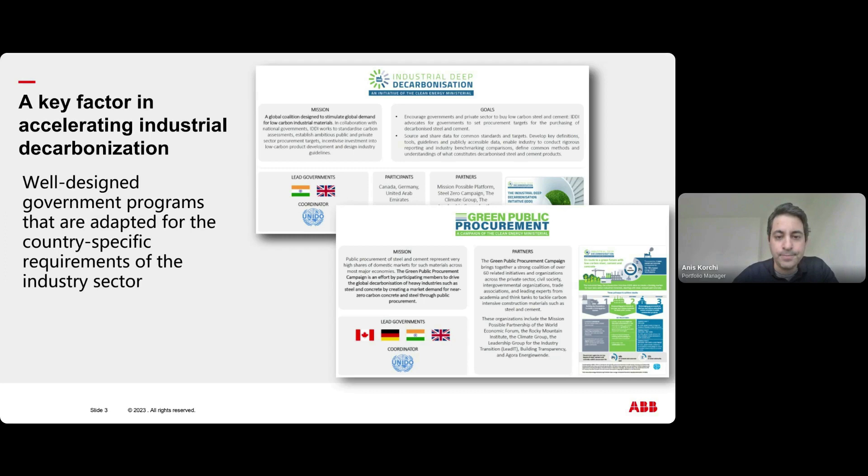There are several standards out there, but one which is widely followed in our industry is the ISO 50001 certification. We see it growing in number across the globe and across our verticals, and more organizations are implementing it in order to benefit from the beneficial cycle we explained in the previous webinar: monitoring our energy, doing some forecasting, and then stepping up with optimization exercises. Those organizations are also following this certification to show their engagement towards decarbonization, to their supply chain partners and also to the local authorities.

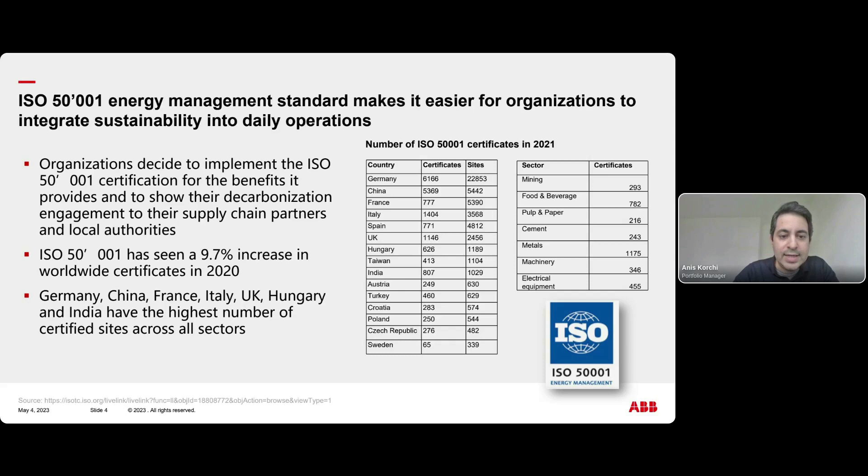We would like to illustrate this with a case study from one of our clients in China. This client was recognized by the international organization Clean Energy Ministerial. The case study here is a cement plant in China which has followed the certification of energy management, and they have also well documented the progress over a 5-year period.

The leadership of this company pushed hard, positively, for their team to set what we call science-based targets. They also pushed to have a continuous evaluation process and to introduce all of that into their daily processes in order to have the right accountabilities and responsibilities within their company.

Several initiatives were run to lower their coal consumption. Examples are using alternative fuels, and other examples are related to introducing energy-efficient equipment. Doing so, they were able to reduce their energy consumption by almost 8%. And of course, there are several factors that can explain that.

Software, yes, it's one of them, but it is not the main parameter there. But we still need to explain that without a proper energy management software, a well-structured analysis of their energy consumption, a data-driven program also would not have been possible. By going with that approach, this client was evaluated by an external auditor as an enterprise which is outperforming its peers, not only in China, but also abroad.

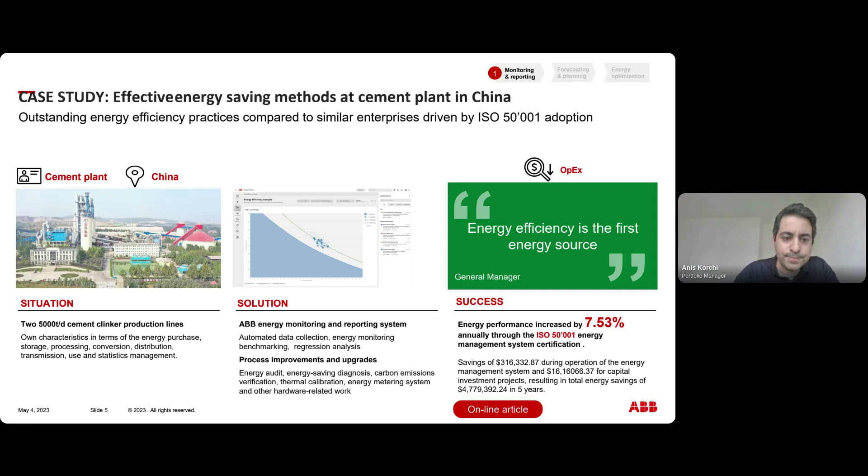Here you have another example in the mining industry where embedding sustainability into the daily operation was done successfully. Within their centralized control system, this client has run an energy management software along with other technologies like substation automation, power control, advanced process control, and also extensive predictive maintenance.

All of those building blocks, or digital Legos, enabled the client to install new processes to reduce their water usage by almost 90%. They also reduced their fuel consumption by around 70 to 80%, and they divided their greenhouse gases by two. So it's quite an achievement, but this achievement can be pushed much further by introducing solutions to do energy forecasting and optimization. This is what we will try to demonstrate in the coming slides.

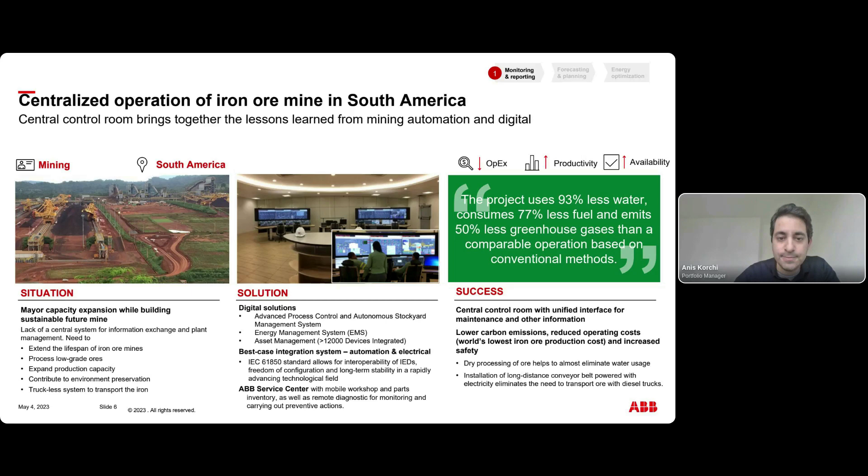Here, I would like to explain that energy optimization can be done in different ways, and one of the options is to do load management. It is about using an asset when demand is small.

To better explain this concept, I will use a simple case from our everyday life, which is commuting to work. Let's imagine this is me commuting to work using an asset which we call the road, the national road. Living downtown means driving to work against the traffic flow and avoiding most of the traffic jams. This means I'm using that asset, the road, when its utilization rate is low.

The same thing happens in the evening driving back home. So the conclusion here is that my load balancing for the asset, which is the road, is fairly good, but there is still room to improve this.

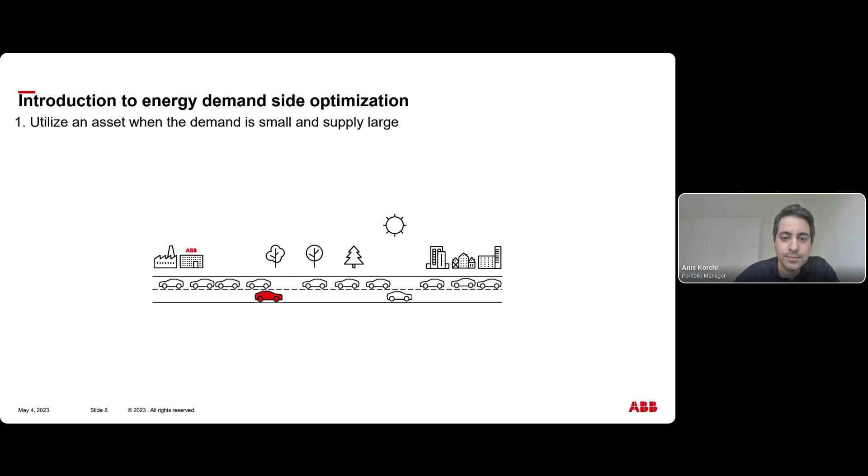In fact, I will find the total optimum by shifting my demand pattern even further into the night when there is even less traffic and close to unlimited supply of this asset, which is the road capacity. Some of the traffic lights are blinking during the night, so it makes my commuting quite smooth.

I don't need to accelerate, stop, and start again my vehicle, so it's more efficient in terms of energy consumption. Now by doing that, I have an optimized solution against one asset - that's the road. My travel time is at the minimum and cannot be improved further. If there would be a road market, the price for that asset would be optimal at those times.

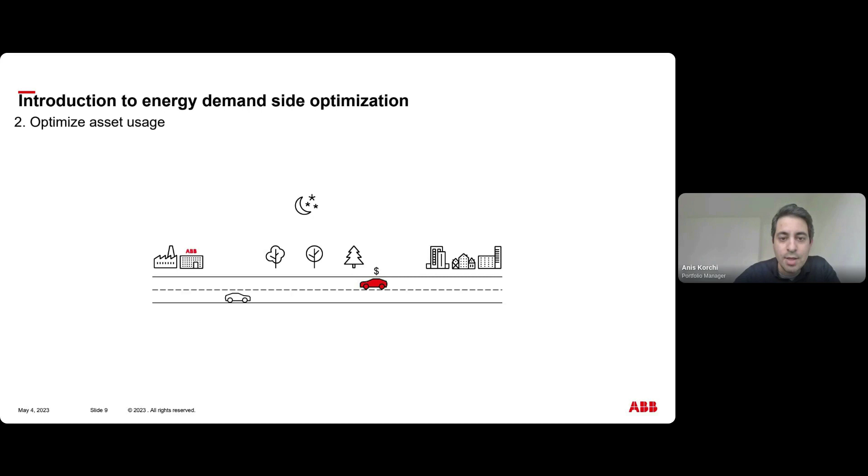But reality is a bit more complex because we cannot just drive in by night. We have other commitments. We need to spend time with the family. We need to sleep to be productive during the daytime. So here we need to rethink this optimization a bit and adapt it to those daily constraints that we have.

Taking into account those constraints, we can then build a cost function leading to the optimal schedule of my commuting. In practice, and also intuitively, it will mean that we will leave home a bit earlier at dawn and drive back home before the rush hour.

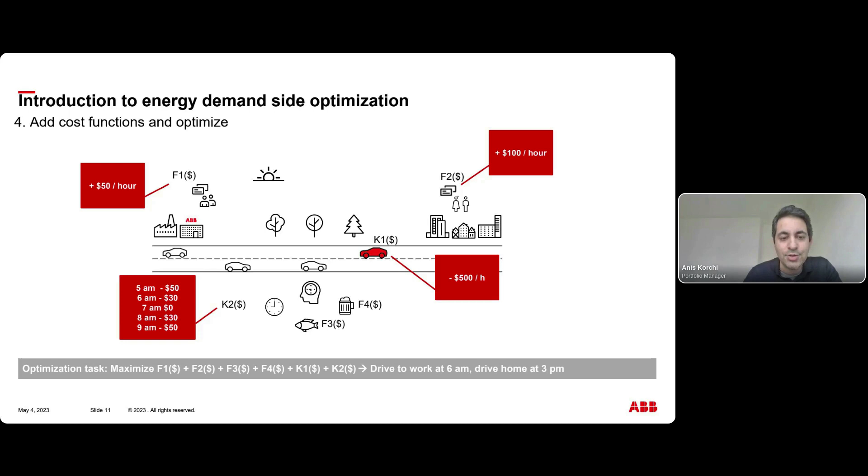So quite intuitive - we don't need complex formulas to get to that conclusion, and we don't need a complex spreadsheet to do that either. But if we go back to the industrial setup, I would have hundreds of those constraints, if not thousands. The situation would also change constantly every 15 minutes, depending on the energy market. And we may also have several assets to optimize in parallel.

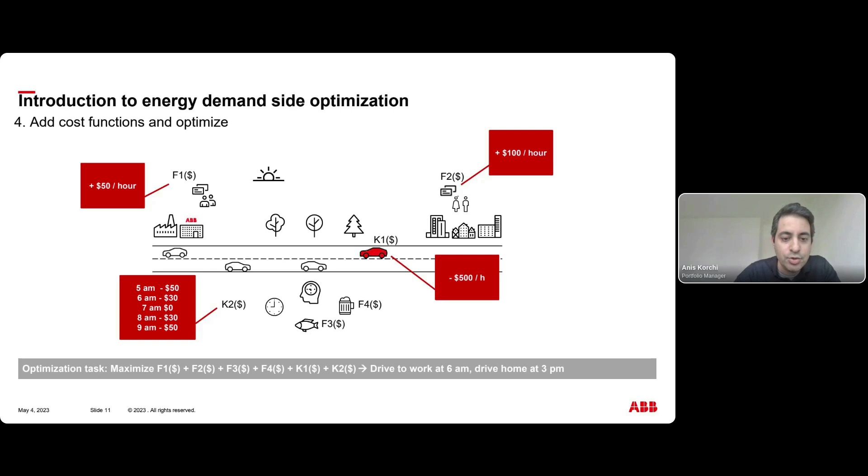So this intuitive analysis, and also a simple spreadsheet with a few linear equations, will quickly fall short when trying to optimize the situation. This is why we would like to introduce you to a different way of doing it - a bit more sophisticated, using a digital solution.

To illustrate that, this is a client we have in the metal industry. This client has a complex melt shop that includes several constraints related to the melting configurations, but also different constraints related to the processing, transportation, setup, and cleanup activities.

The customer's objective here was to reduce its energy cost and be able to run various simulations and what-if analysis. One of the key assets they wanted to optimize was the electric arc furnace, which is a high consumer.

We have thus enabled a digital energy optimization system that automatically generates an optimal production schedule for the next 7 days. It takes into account the energy prices in the volatile electricity market, but it also takes into account maintenance plans, the current status of the melt shop, the availability of different equipment, but also penalties and violations of hold-up times between stages of the process.

Overall, we were able to provide 2 to 5% energy cost reductions, which is quite sizable when you look at the absolute energy consumption of this client.

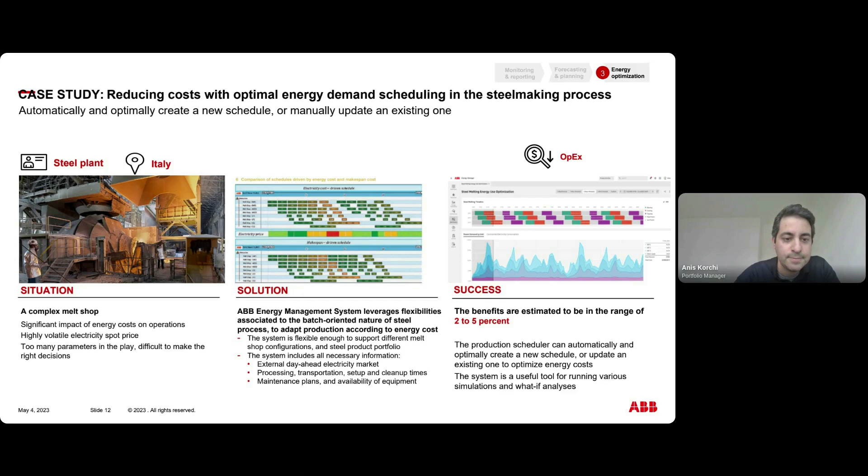I will use this slide just to summarize the fact that there are several ways to do energy optimization. The one that we have discussed in the previous slides is what we call more focused on the demand side. So we are scheduling our assets, taking into account production flexibilities and the production buffers.

There is another way to optimize. It is about looking at the energy supply, especially when our sites have access to electricity from the grid, but also you may have your own powerhouse, maybe some additional renewable energies, and also some energy storage facilities directly on your site. The key question is, how do you balance all of that in order to reduce your overall energy costs?

So I will give now the lead to Nazanin, my colleague, to take you through a few examples that will explain that. Thank you all. Thank you, Anis.

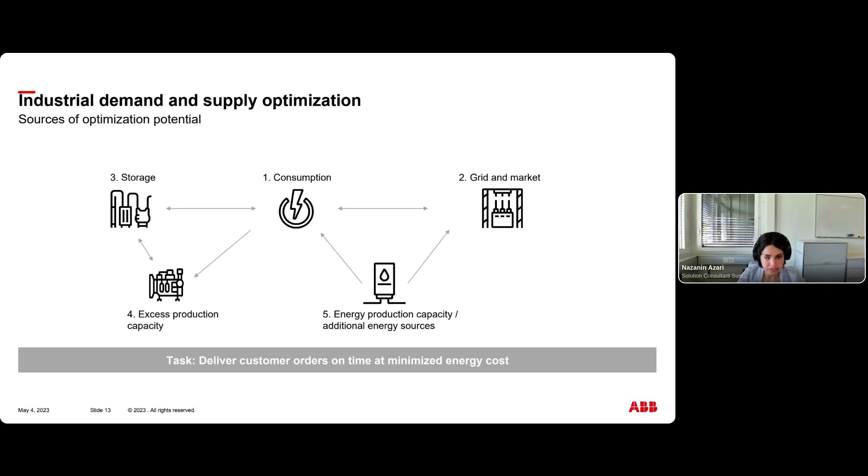Handling the supply side of the energy is also an interesting topic. Let me give you an example from a pulp and paper customer with 14 mills across Europe. The company has its own generation and shares in various power plants, and faces complexity arising from variable, but also potential, more affordable electricity prices on an hourly basis in a day-ahead market, and is also planning to switch to 15-minute time steps.

The optimization in this case is around energy source balancing and energy trading opportunities. Energy cost optimization takes into account all available resources, their prices, and the operational constraints they have. Additional profits were realized from effective use of energy reserves and hydropower here. This customer reported that the initial system payback was only a few months.

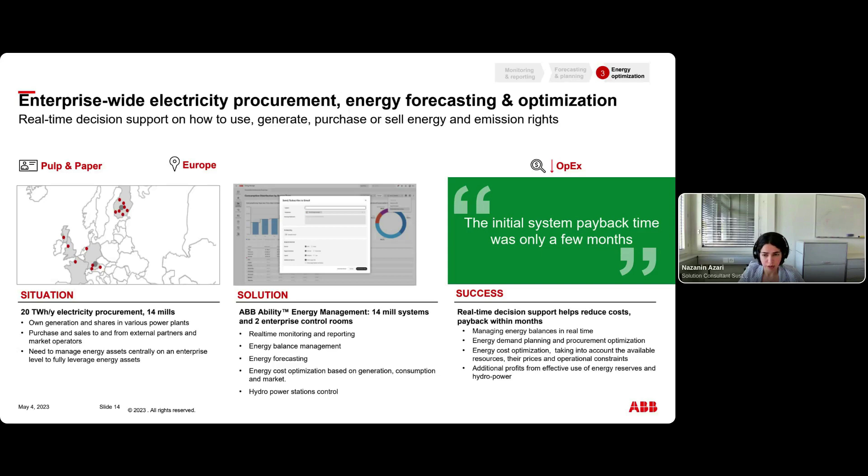What else could be optimized? Let's go to another case study from pulp and paper. Pulp and paper mills have boilers, which represent another complex optimization problem. Not only is steam needed at different but very specific pressures and temperatures, but the consumption rate is highly variable due to variability of process conditions, trips or starts of steam consumers, and so on. Steam network stability and reliable power output are difficult to attain.

On top of this, further constraints are added by variable prices and local rules for the energy market. This is a perfect case for an advanced process control solution, which was successfully implemented in digester, bleach, and pulverized fuel boiler plants. It brought 3 to 5% savings in steam cost and pays for itself in less than a year. This South African mill ensures a much more stable and reliable energy supply thanks to digitalization.

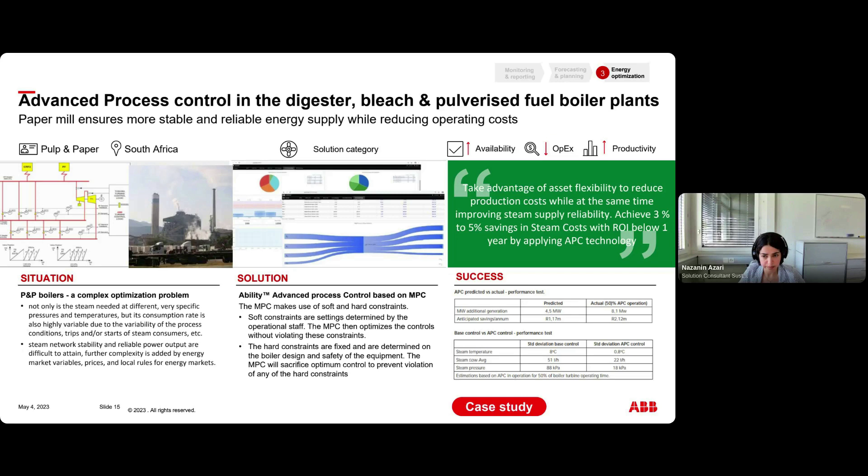One more digital champion I would like to talk about today is an integrated steel mill. Energy represents about 20% of their production costs, and therefore energy efficiency is crucial for both profitability and their environmental policy. An integrated steel mill generates higher calorific value byproduct gases at varying rates.

The differences between gas generation and consumption rates are compensated with gas holders. However, under certain circumstances, the imbalances can lead to the flaring of excessive gas or require the purchase of supplementary fuel.

ABB's energy management system has sophisticated monitoring, planning, and optimization tools to model complex energy interconnections between various processes of the mill. It determines the optimal trade-off between gas holder level control, flare minimization, and optimization of electricity purchase versus internal power generation. The system not only reduces cost and improves energy efficiency, but also manages carbon footprint and provides environmental reporting features.

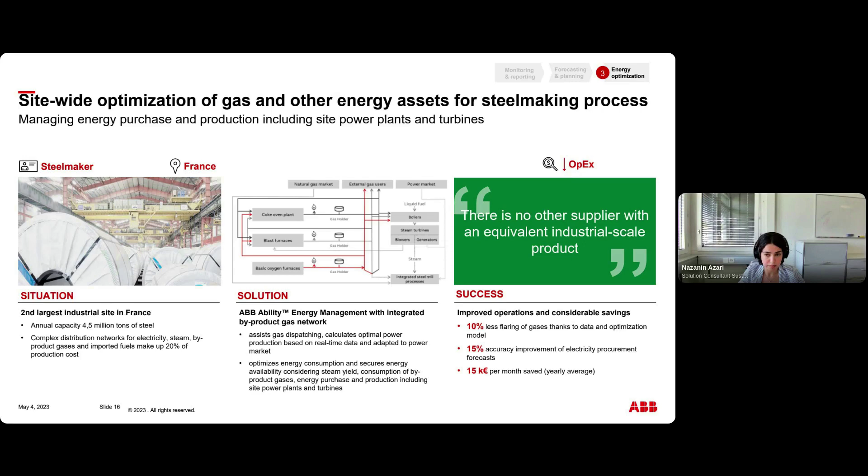To summarize today's session: the typical steps and modular approach for deploying digital solutions for industrial energy management start with monitoring energy usage at plant and process level with real-time visualization and data display. With that, you can identify best performance of process areas and opportunities for improvement, and get reports on energy consumption patterns of process areas and production lines, which helps analyze inefficiencies in the plant and process areas.

By setting up alarms and notifications, corrective measures can be taken immediately. Forecasting energy consumption schedules for process areas based on production plans and measured consumption, as well as solving real-time economic optimization problems covering your own generation, trading, and use across industrial plants and power plants, helps you save costs.

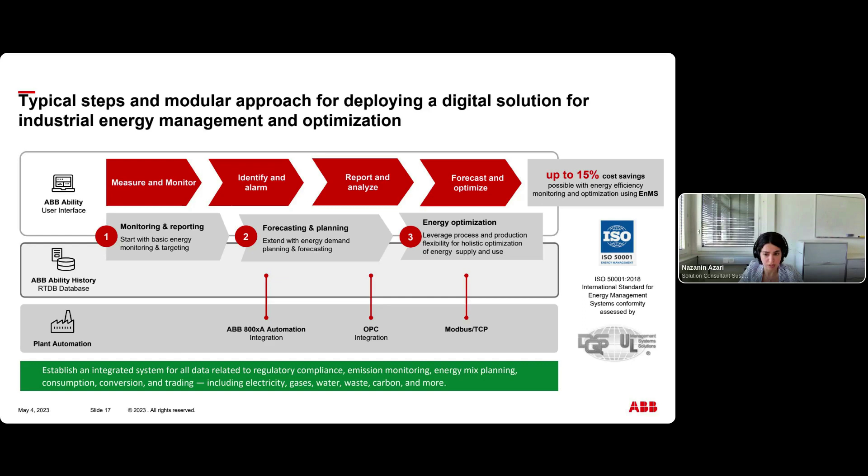As you could see today during the case studies, there are no two plants that use energy in the same way. Energy price fluctuations, time-varying transfer, conversion, and use of utilities, as well as renewables, may disturb highly sensitive continuous processes. This may increase energy cost and have a negative impact on product quality or even result in downtime. That's why industrial plants need a purpose-built energy management system that adapts to their specific processes, energy mix, and local market and regulation.

Let's quickly show you how it works. In my demo, we have specific demos for mining and for metals, as well as for pulp and paper. Based on today's attendee statistics, I would like to show you the pulp and paper demo.

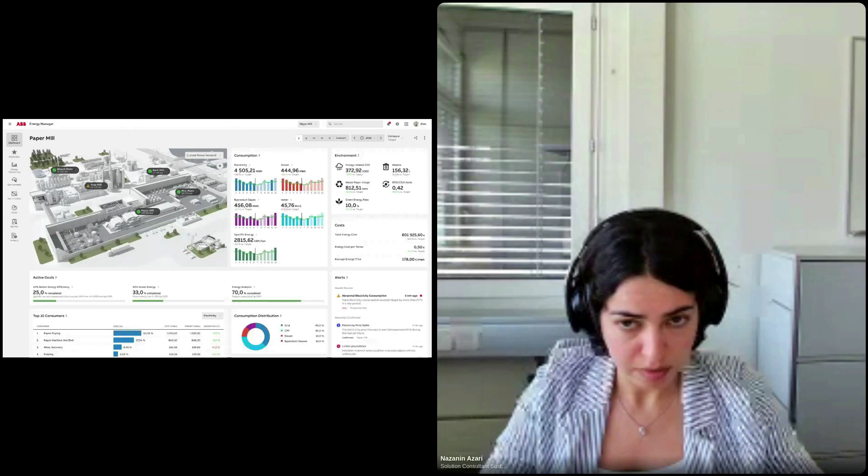Keep in mind that this demo consists of dummy data and simulations, so that's one thing to mention.

Most mills have ambitious sustainability targets, and they may still use Excel to aggregate data and total energy consumption and cost. There are also some calculations and data tracking being done in a semi-manual way. To generate an ESG report is time consuming, sometimes taking up to 5 days to consolidate that data. But having a modern digital platform for energy and sustainability on an enterprise or plant level can automate this kind of report generation.

By having the dashboard view, you can have an overview of your whole system and plant in one glance. It visualizes the trends for energy consumption, and we're not just talking about electricity, we're talking about steam, gases, water, and specific energy. We also mention environmental KPIs like wastewater and CO2 or green energy rates.

Having those, and being able to adapt that to the roles that you need on the site, which need to track these values and also track them at different resolutions, would help you be more efficient in this area and be able to reduce at least 40% of the time required for reporting and analytics. This also helps you maintain and obtain the ISO 50001 certification.

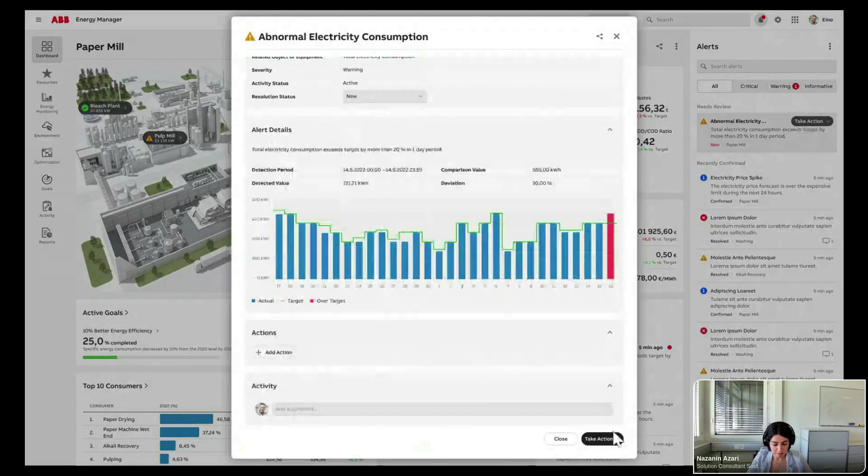Since you have this platform, it's also easy for you as you introduce renewables to your plant or new processes in your system, as well as if you're starting to participate in the energy market. By having automatic notification, you can also see abnormalities and uncommon patterns in your system, be able to investigate, and be able to track and take actions.

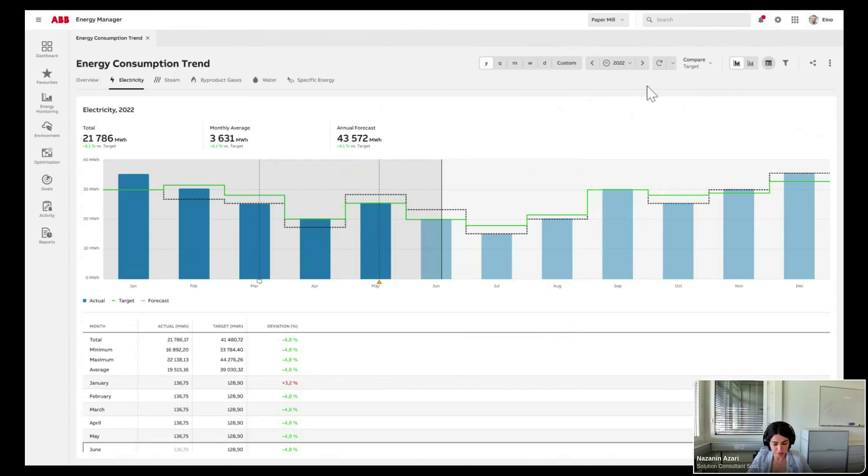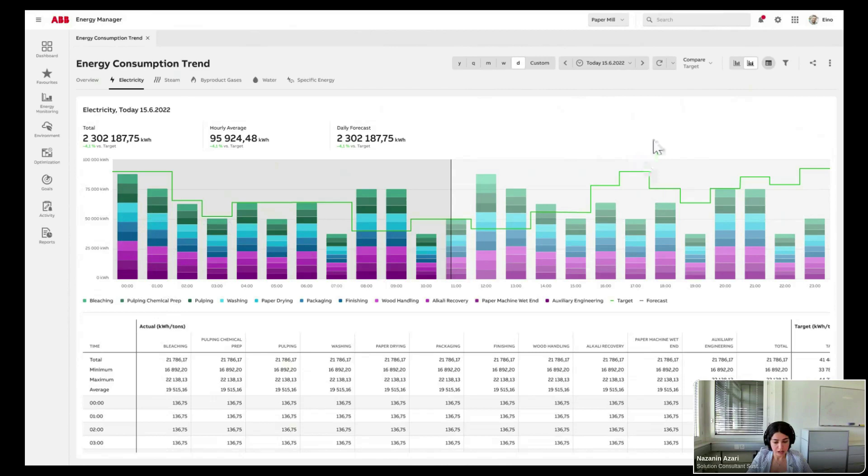Let's go to our consumption. Here you have the real-time online tool, and you don't need to wait for a report from each department. You can also see the comments as well as disturbances happening on the site to basically define the deviations happening and why you're far from your target or forecast. By having granularity of data coming from each part of your plant, and also what you're getting from each department, you can track and make better analytics and decision making on your site.

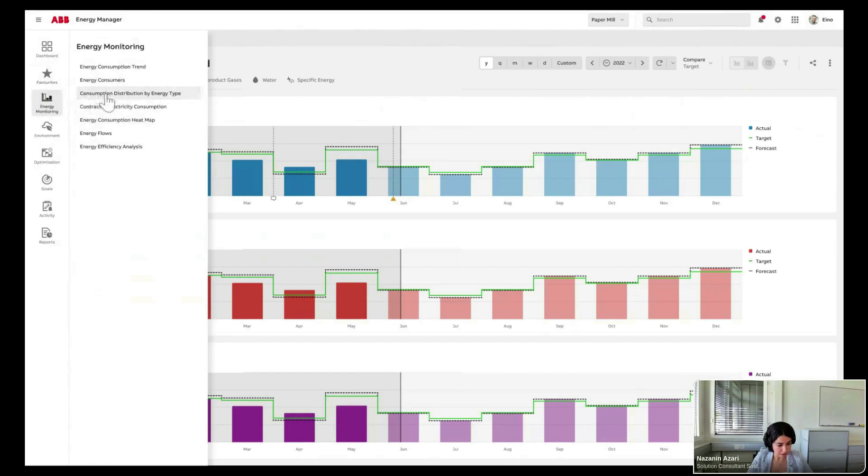Going forward, to avoid energy demand and supply risk and lower your costs, you need to understand which type of energy is consumed the most and when. Our system lets you analyze the consumption distribution via energy type on your plant, as you see here. We have different types of energy present on the site.

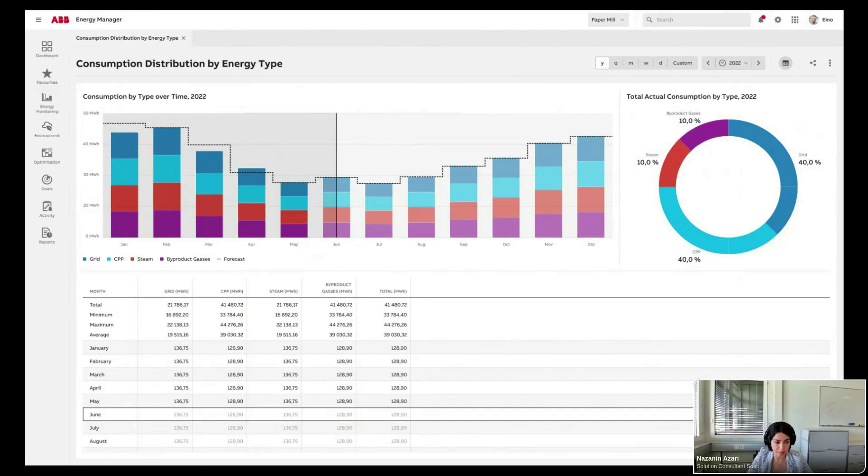The forecast will also show you when more electricity from the grid will be required, and with an accurate forecast, your procurement department will be able to notify and adjust accordingly. Besides that, of course, you have the reporting tool to report on the variables and data you need, and also be able to subscribe to that if needed on a regular basis.

Another analytic tool I want to mention is the contracted electricity consumption. It's a timeline diagram, which gives you the opportunity to get information from your production planning and the mill, and be able to see your energy consumption calculated.

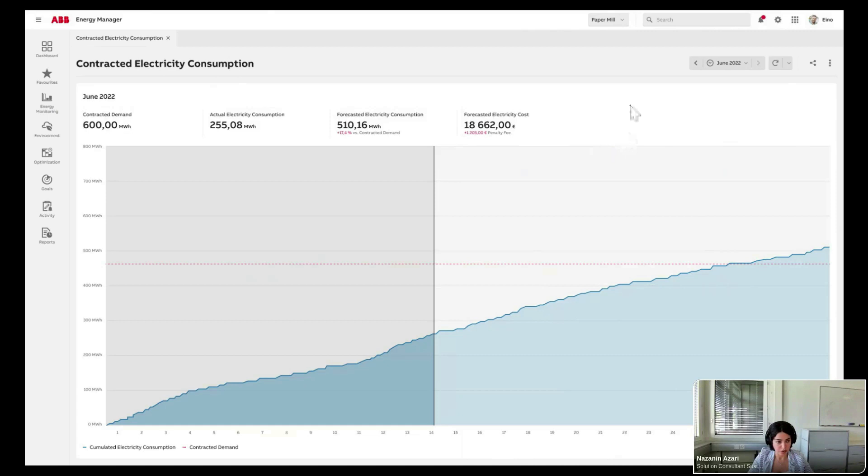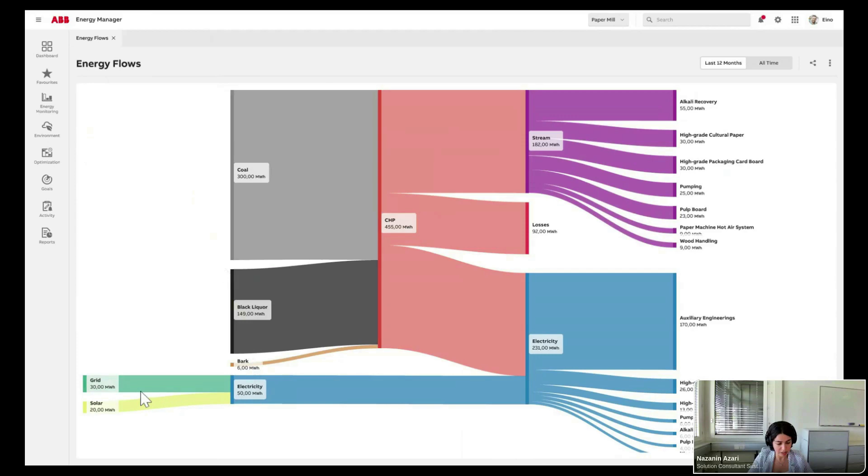For example, here you can activate an alarm, which gives you a heads up if you're deviating and leading to penalties, and you can make the decision whether to take the penalty charges, allocate the costs respectively, or change the plans inside your site. As well, having the overview of your energy flow with the Sankey diagram helps you trace where the energy is going and how it's being used inside your plant.

Another way of analytics is the energy efficiency analytics. Our system enables demand-side energy management, exploiting real-time energy data. Here you can see how the regression is made within your product volume and specific energy, giving you the tools and power to analyze your production plan and make decisions.

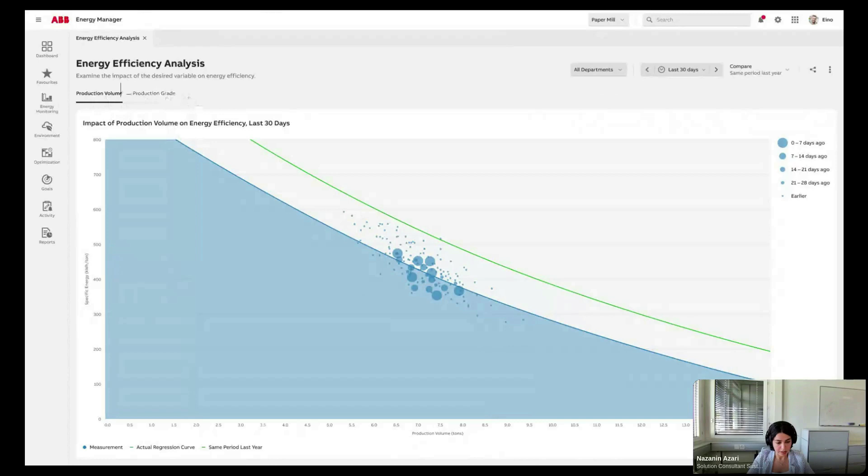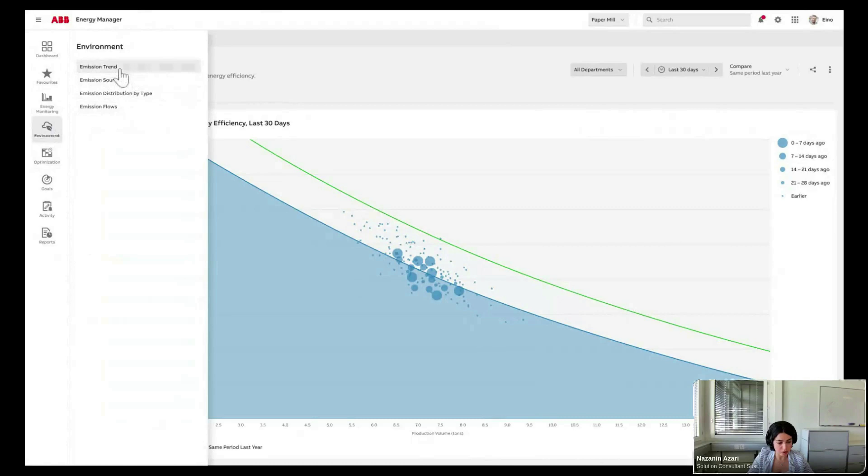You can have the same overview for your emissions, seeing the emission flow or basically the emission trends on your site. If you're making any kind of programs to reduce your emissions, you can compare that from last year and also forecast how you're going based on your production.

Moving forward, we have also the optimization case, in this case for pulp and paper. Our system helps you understand the demand side energy and also the real-time price coming from the market, as well as the process flexibilities, and it should help you do the optimization on your plants. If you want to know more about these kinds of optimizations, please get in touch with us.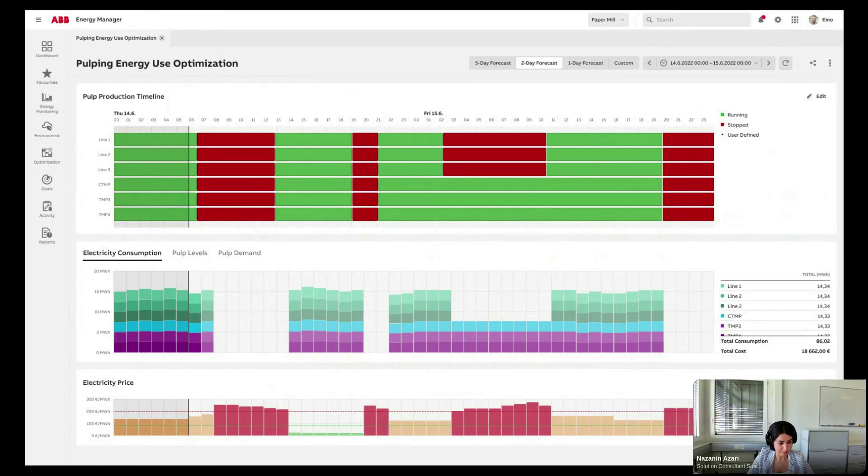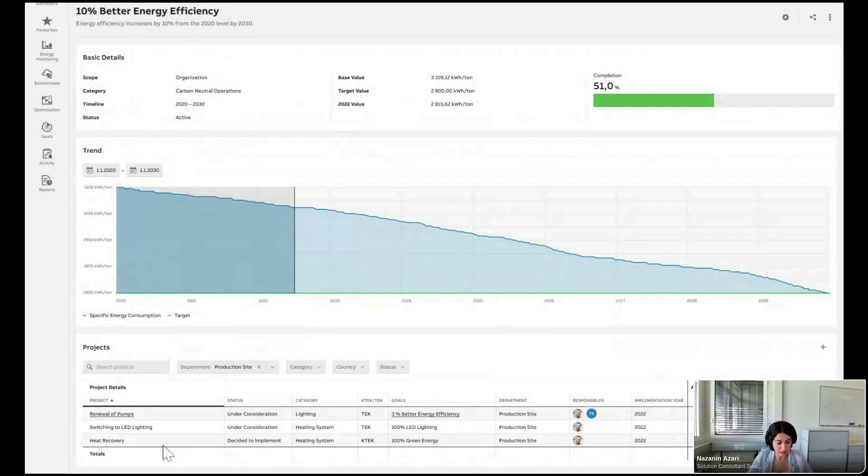Also, moving forward, one of the essentials to move toward sustainability is to define goals, having goals and projects, and being able to trace and track on that, as well as defining the KPIs and tracing the KPIs. This is available on the system, and it helps you come up and be able to get in touch and have understandable and good data and analytics toward your projects, and what is happening on your plant.

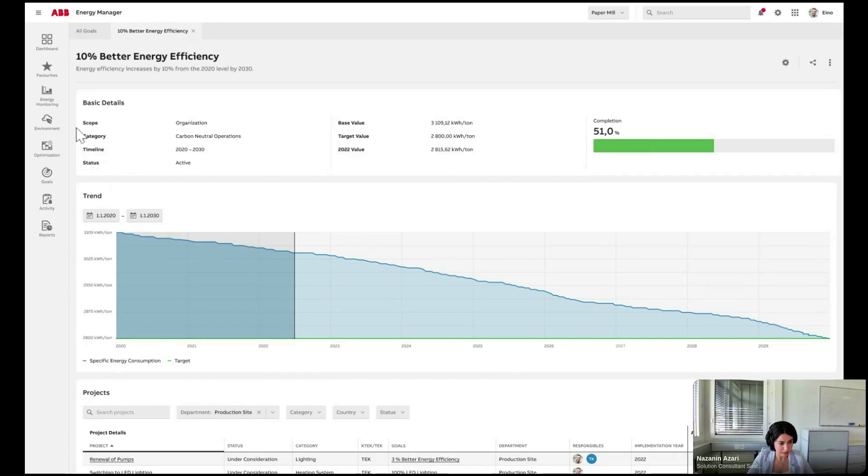That can also be mentioned for the alert, so you can do that kind of overview on the alert, make the notifications, as well as apply projects.